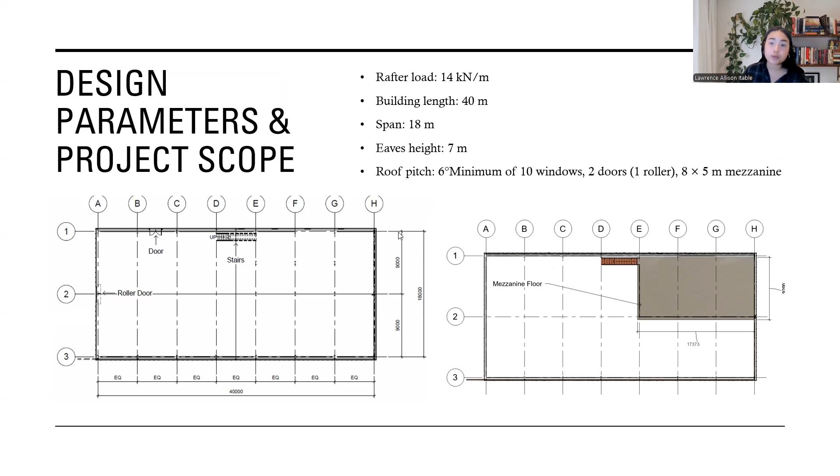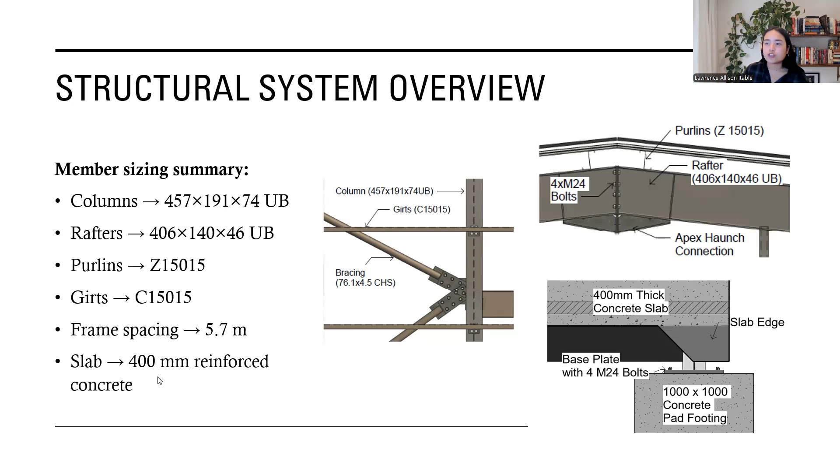So in terms of our structural system overview, these are the members that we have chosen for the loads that it will carry. For the frame spacing, as you can see, we have a 5.7 meter spacing, and we've got the 400 mil reinforced concrete slab. So for wall cladding, we've used the Lysaght Spandek, which is a 24 mil thick cladding, and also a Klip-Lok Classic for the roof sheeting, which is 40 mil thick.

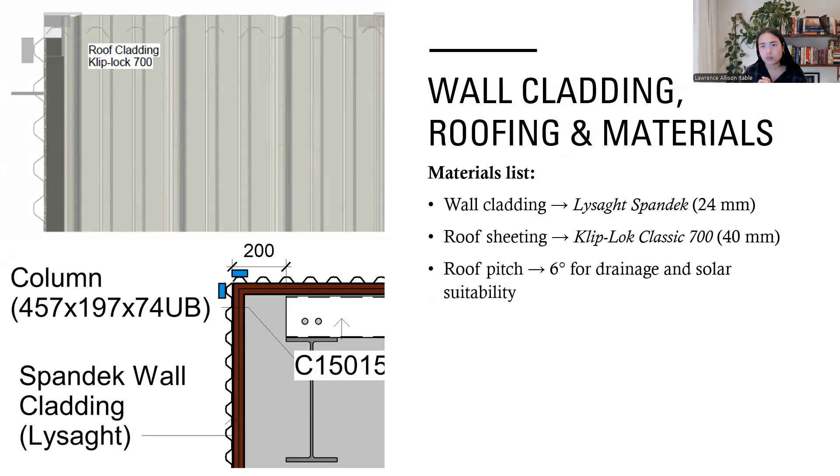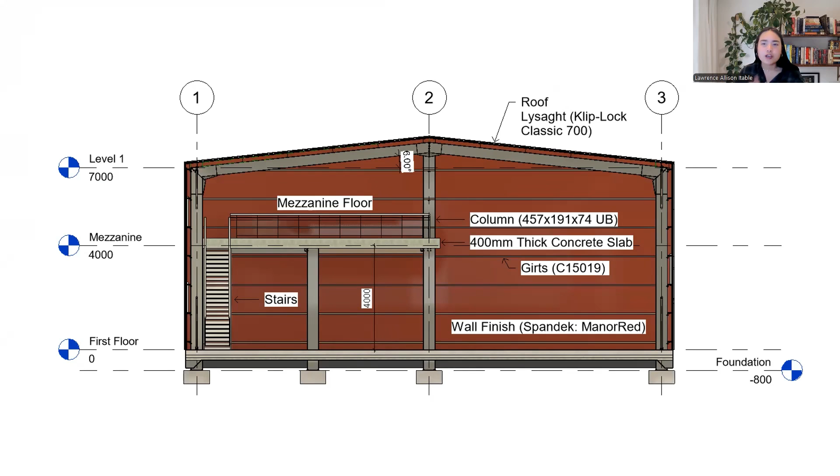So the Spandek profile for the wall cladding has deep ribs that resist wind suction and reduce the number of girts required, which is more economical. As you can see with our design as well, we've used the Manor Red as a wall finish. It complements Wollongong's coastal industrial palettes, but at the same time, it has a light reflective coating, which lowers heat absorption and improves thermal comfort and energy efficiency.

So some questions that we have received from our clients. So why we have adopted a steel portal frame design: firstly, as you can see, there's not many interior columns, so it has an unobstructed workspace. So it's a clear span design, but at the same time, it's very cost efficient because a lot of the steel members are prefabricated. So it's also very easy to build and very time efficient.

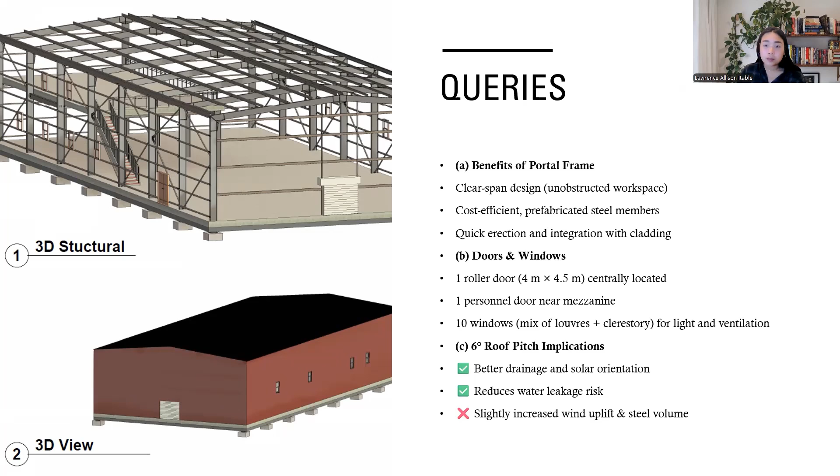You can see we've got 10 windows. It's the minimum requirement from our client. These windows are positioned for natural lighting and cross ventilation, and we've got the roller door at the very front for vehicle entry and the personnel door at the side there. With the 6-degree roof pitch, unfortunately it increased the wind uplift, but we have safely handled that in our wind analysis.

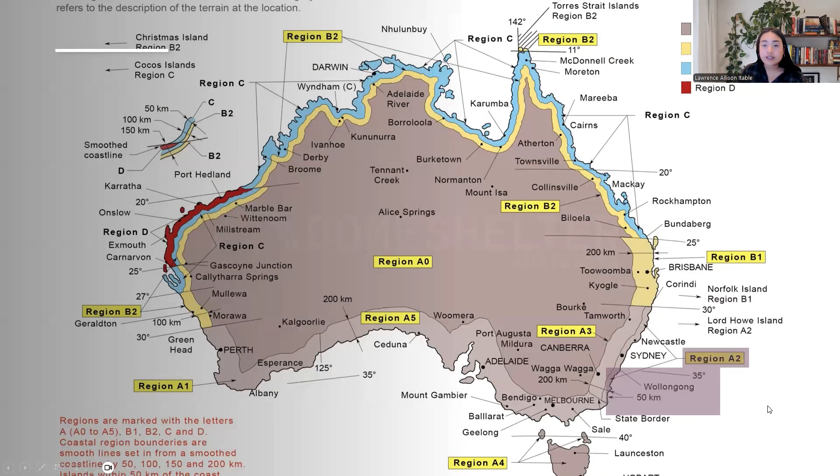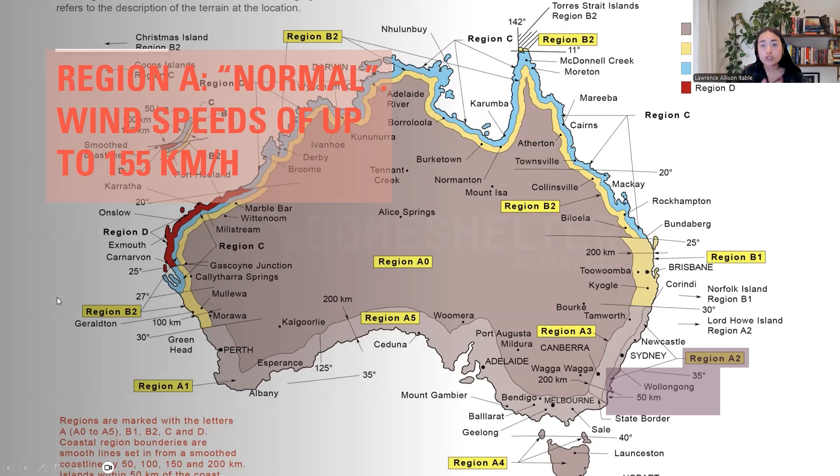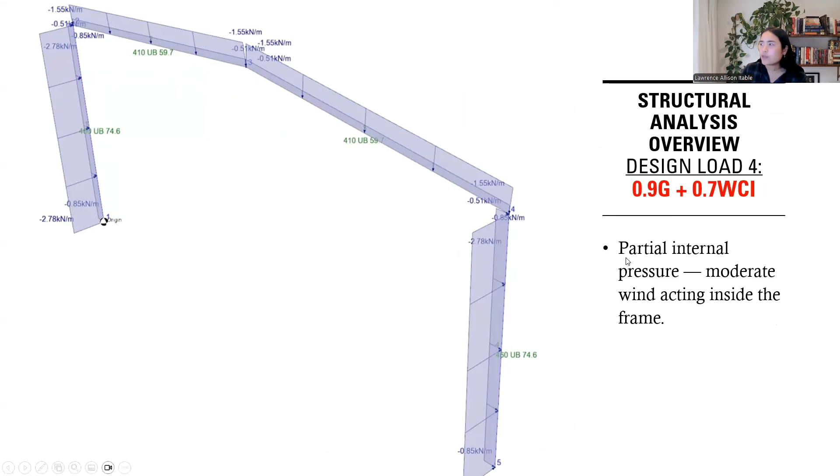Okay, so just talking about the wind analysis. So our site in Wollongong is located in region A2. Region A2 is classified as a normal wind speed, which has a 45 meter per second design wind speed, which we use for the design. As you can see here, we've got 4 load cases for uplift and lateral wind pressure, roof suction, and also partial internal pressure. And as you can see here, it has smooth curves from the columns to rafters, which is equal load sharing.

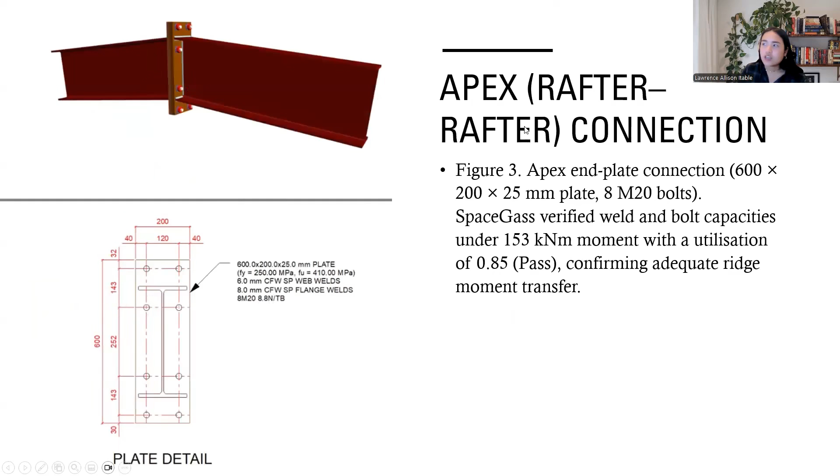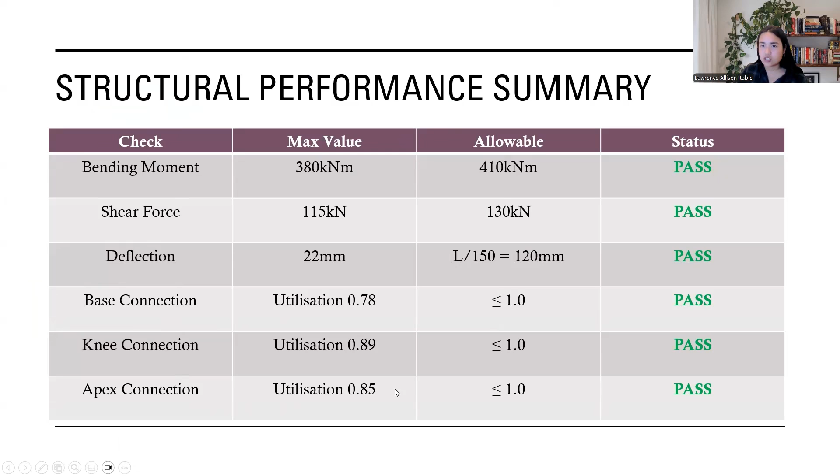So for structural connections, we've used SpaceGass to determine the plates and the bolts that we're going to use. So that's for our base plate. This is for the column to rafter connection and also our apex connection. So as you can see here, our chosen members have higher capacity than the maximum bending moment, shear force, and the deflection as well. So it all passes AS4100. And at the same time for our connections, the base, knee, and apex connection, it's all less than 1.0. So it passes AS1170.2.

So technically that concludes the end of the report.